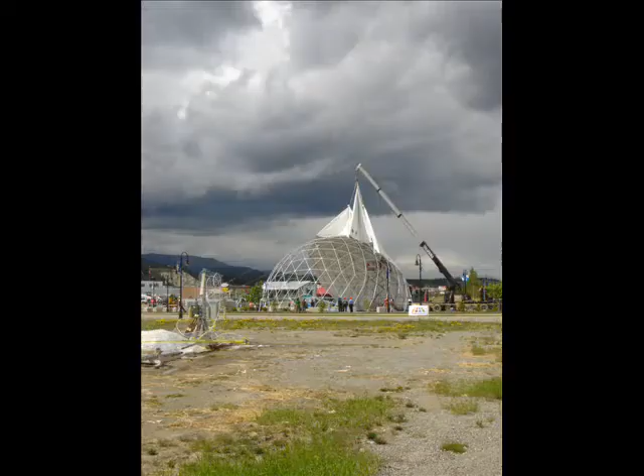A place that you can afford to not only purchase, but to live in. A place where you can learn, be active, play, and celebrate without having to get into your car. You know your neighbors, and you feel safe. Living in a neighborhood renowned for its sustainable practices, this is the opportunity for the Whistle Bend neighborhood.

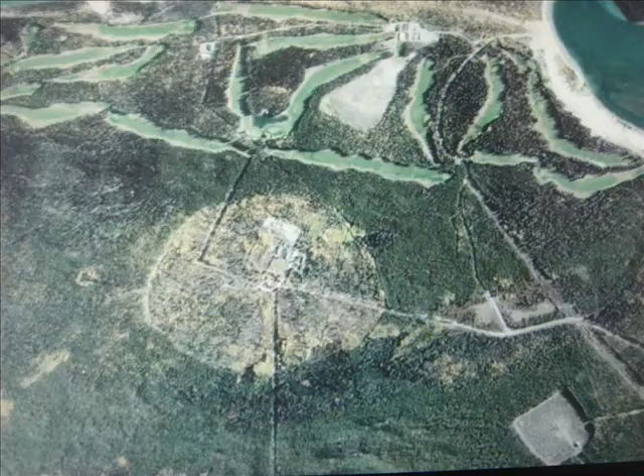Whistle Bend is a 700-hectare tract of land on the Porter Creek Bench located north of the city center, and it's been identified in the official community plan as the next logical location for large-scale residential development. And it's anticipated that development will occur over the next 20 years for as many as 10,000 new residents. The development will be based on the principles of innovation, inclusivity of interests, and sustainability.

There was a charrette process hosted in 2006, and through that process a common vision for the future of this land was articulated, and there was a real shared understanding of the associated issues, opportunities, and the parameters for future development. Now this vision, established through the charrette process, is being translated into a detailed master plan.

This video is one of the many ways in which we have tried to reach out to the community to confirm the key elements of the final master plan for the Whistle Bend neighborhood. So please take this opportunity to learn about these key elements and to provide us with feedback so that your ideal neighborhood is created. I'm now going to pass it over to Tom Becker, the project lead, to describe each option in more detail.

Hi, my name is Tom Becker. I'm with the AECOM consulting team working on the Whistle Bend project for the city of Whitehorse. What we'd like to do is briefly review the three concept alternatives that have been prepared to date.

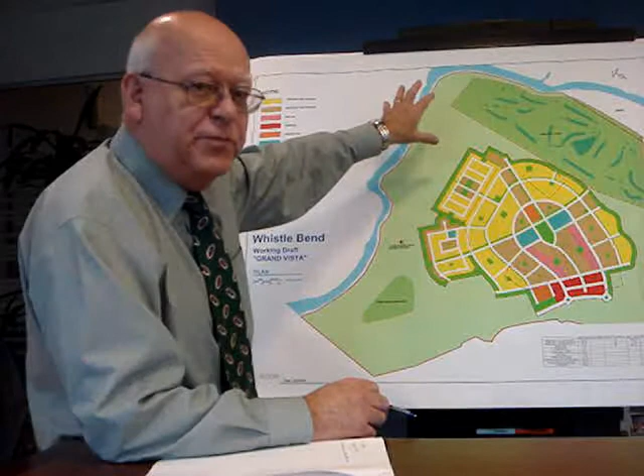This first concept that you see here we call the Grand Vista concept. It orients the main roads coming off Range Road over here in a northerly direction to give you some spectacular views over the mountains to the north across the Yukon River. So we have this long axis running over here with a central park in the central area, a commercial complex situated along Range Road to provide for retail services and other service commercial uses that would serve both the Porter Creek area and the Whistle Bend area in future.

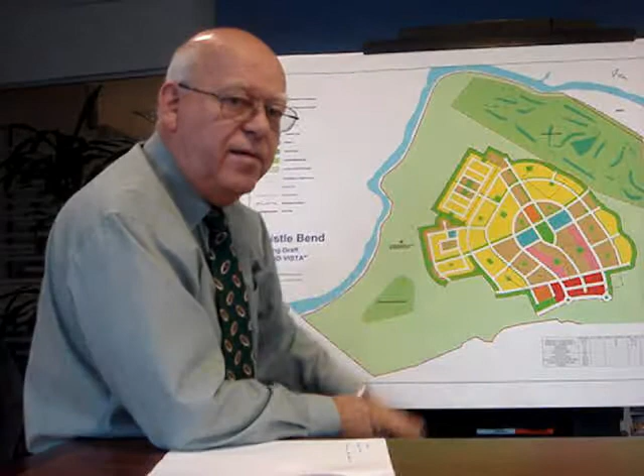The central park located in the middle of the project. Higher density uses around here, this would be townhouses, multifamily apartments and so on, that radiate around the park. It gives everyone convenient access to the park, and having this loop road run around here also provides for convenient transit access. The light yellow areas are lower density areas including single family homes, some townhouse projects, duplexes, fourplexes and so on. This would be the developed area that you see here.

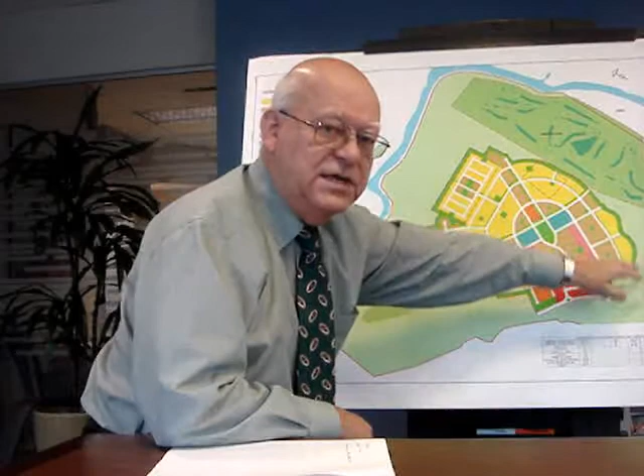Blue represents school sites, potentially a community use or church situated over here. And then all of the surrounding area would be retained as greenbelt area supported by the existing golf course here, as well as an environmentally sensitive area to the right on the map. And that gives you a general indication of the development potential in the Grand Vista option that you see here, and it would support a population of around 9,000 people.

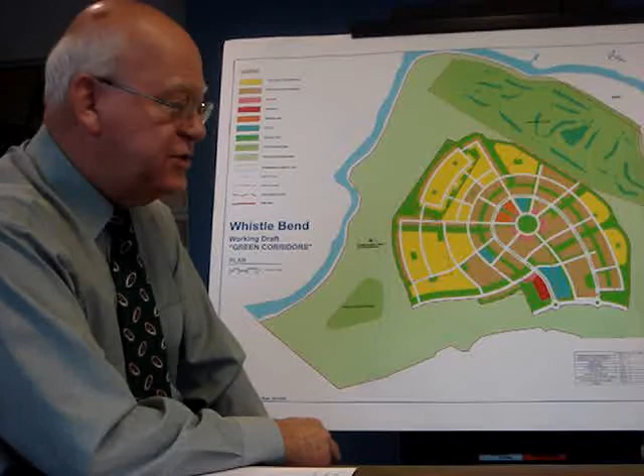This particular option we have called the Green Corridors option, and it's very much reflective of the options developed during the design charrette held a couple of years ago. What we've done here is we still have Range Road over here, a loop road system, several of them that go inside the Whistle Bend area, a central park in the middle, a large school site just off Range Road, and green corridors that extend out to the green belt surrounding the property.

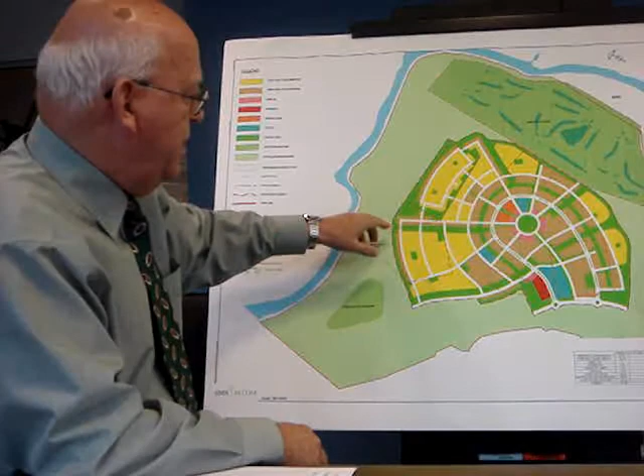Again, higher density uses in the core area with convenient access to transit. One of the nice features about this concept, again, is that a transit route could be developed right in the middle. Lots of corridors that give access to recreation facilities.

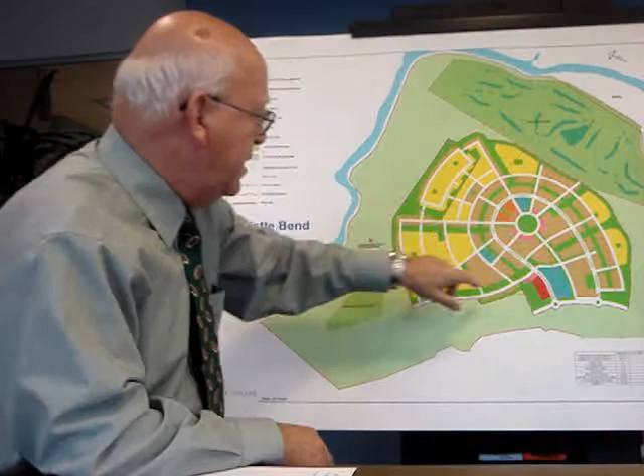Somewhat higher densities here, townhouses, multifamily, but could also include some single-family housing, and then lower density areas shown by the yellow, surrounded again with somewhat higher densities along the green recreation belt or multi-use corridor on the perimeter of the site. The core area would include some mixed-use development to support the park area,

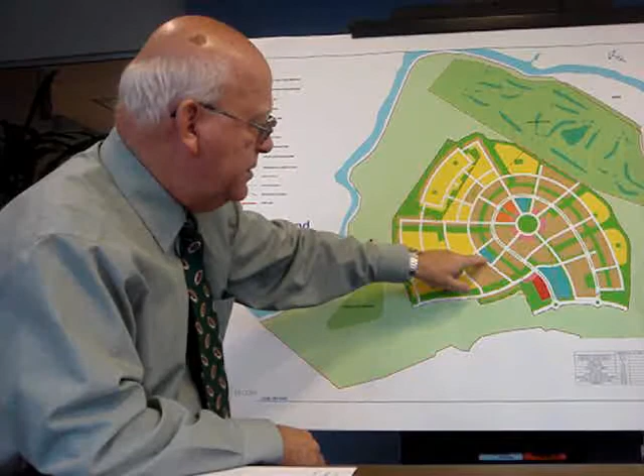more intensive or community uses just adjacent to that. That could be various types of public facilities, elementary school here, an elementary school here, and as noted, a secondary school over here. Again, this concept would have somewhere in the neighborhood of 9,000 to 10,000 people to provide for a lot of long-term pleasant living environment for the city.

This particular concept we call the town square concept because it's focused on a large square including park area in the central portion of the Whistle Bend neighborhood, supported by multi-use development that could include a mixture of housing and grade level commercial uses, offices, and so on.

This area is surrounded by multiple family housing, townhouses and apartments shown in the brown area, as well as along the perimeter here where you see some of the brown colored areas. All of that is multiple family housing.

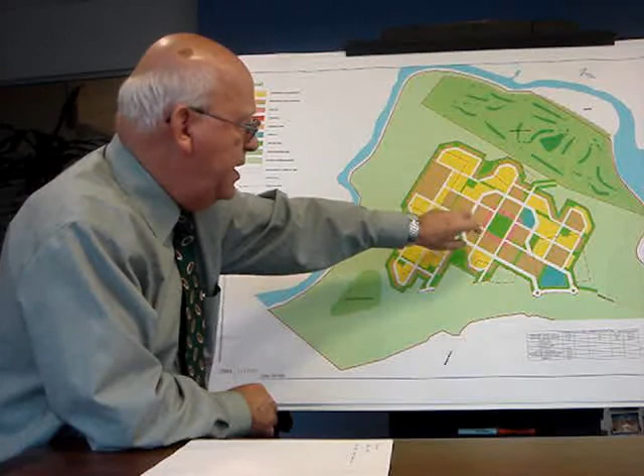The grid road pattern is a bit different than the other two concepts, in that we call it a fused grid road concept. It includes both straight roads shown in east-west or north-south alignments, as well as curvilinear streets around the perimeter of the core area, and internally here within the actual subdivisions we could have additional more curvilinear cul-de-sac streets and so on.

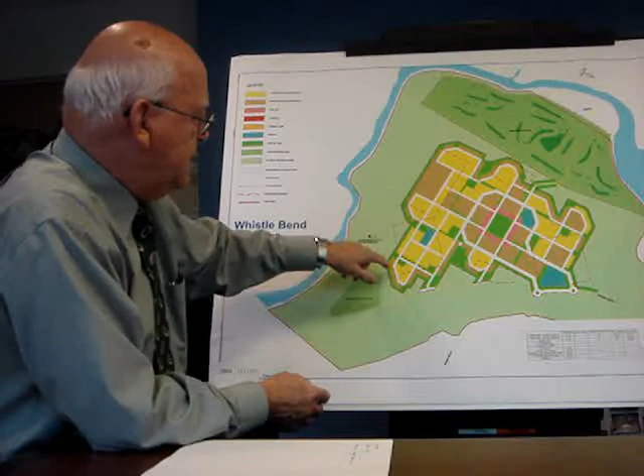Each one of the concepts has a multi-use trail along the perimeter of the site, supported by green belt areas that would stay green, and an active recreation area, which is the existing golf course, that would stay. This concept, which would accommodate roughly 10,000 people, again provides for 2 elementary school sites as well as a secondary school site near the entrance of Range Road.

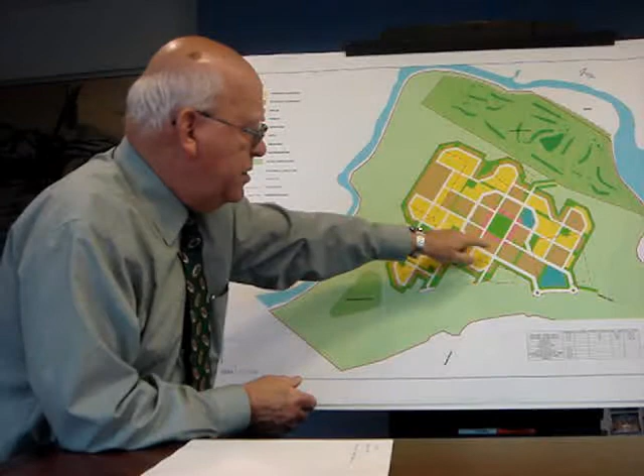And as you see on this concept, we have some traffic circles here that would slow down traffic, makes for convenient access to the area, and a nice entrance because we have a lot of green belt along the perimeter. A lot of green spaces internally, neighborhood parks, internal linear greenways to connect the various residential areas.

All of these concepts are designed to facilitate transit. There's a potential transit corridor here, and you're generally within about 10 minutes, even from the furthest corners of the area, 10 minutes walking distance from the transit loop.

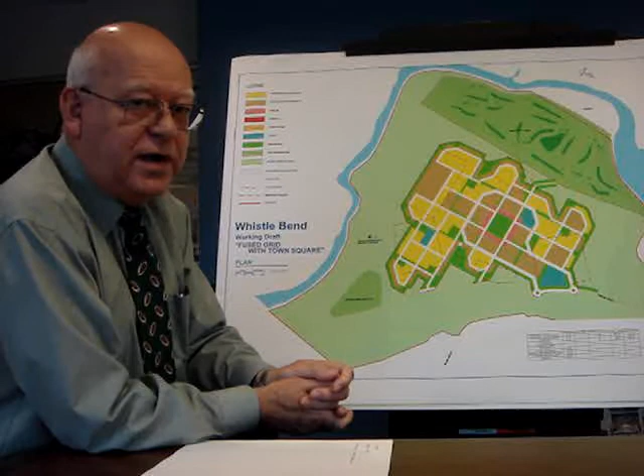So where do we go from here? Well, ultimately we will have to consider technical information. There are some ownership issues, there are leases in the area. All of these will require consideration, but more importantly we want to know what elements of these various options you like to see.

And what we would like to do is get people's input into these options, and out of this will come a preferred concept plan, which will then be detailed much further in terms of lot sizes, the types of housing that will occur. At this point we're really dealing with land use at a very conceptual level.

But if you have some ideas, we'd like to hear about that. We'd like you to participate in the process. Drop a line or look at the website, email, all of those options are available. Bear in mind that the final concept will likely be a variation of what you've seen here. Changes will need to be made, other things will need to be considered, but your input is critically vital to this whole process, and we thank you for your participation.